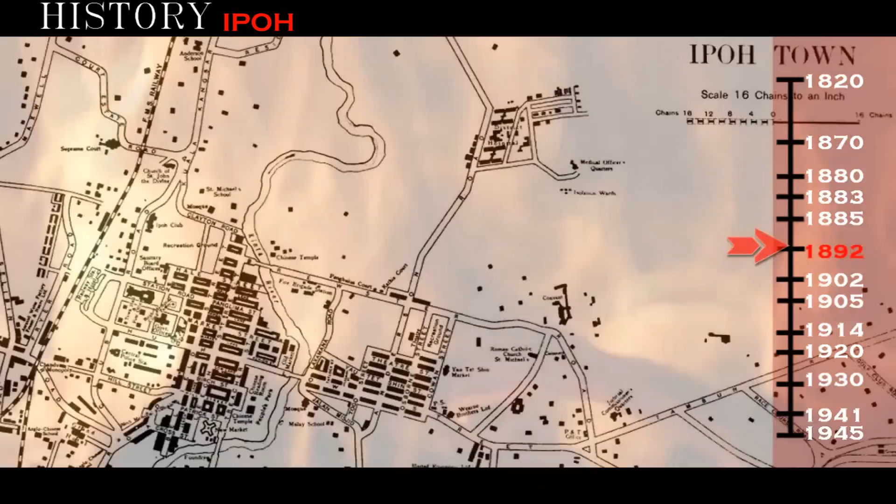However, on June 1, 1892, a fire broke out and destroyed over half the town. The Great Fire of Ipoh gave town planners the opportunity to rearrange the streets in a more orderly grid pattern that remains until today. Overseas chartered banks opened offices, followed by accounting firms, estate agents and brokers.

Vast numbers of people, especially Chinese miners, descended upon Ipoh, transforming it into a business and social center. A local Hakka miner, millionaire Yau Tet Shin, expanded the town across the Kinta River, which became the new town of Ipoh, including a market and a theatre.

The British introduced dredging machines which caused the labour force to decline. Many of them became unemployed and some even changed careers into other industries. As time went by, the Chinese community controlled most of the economy in Ipoh.

The Japanese took over Ipoh on December 28, 1941. They made Ipoh the state capital of Perak. After the British regained control of Ipoh, the city became a center of entertainment and the business community learned to let the good times roll.

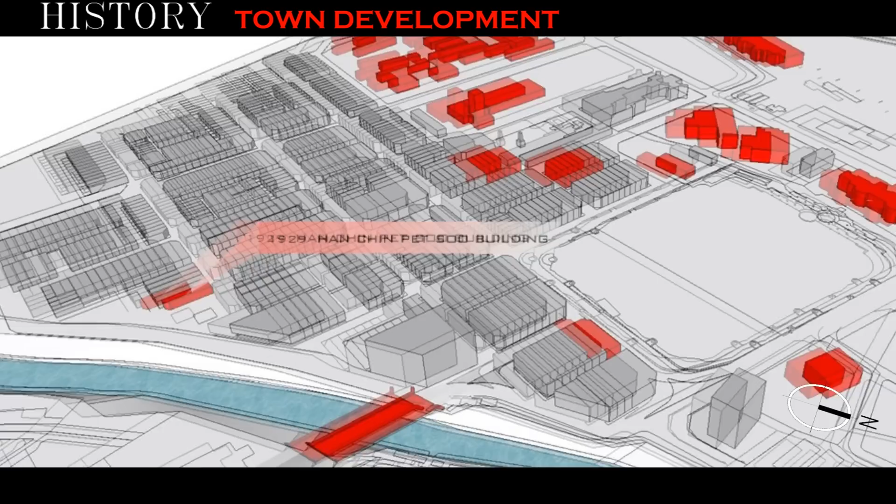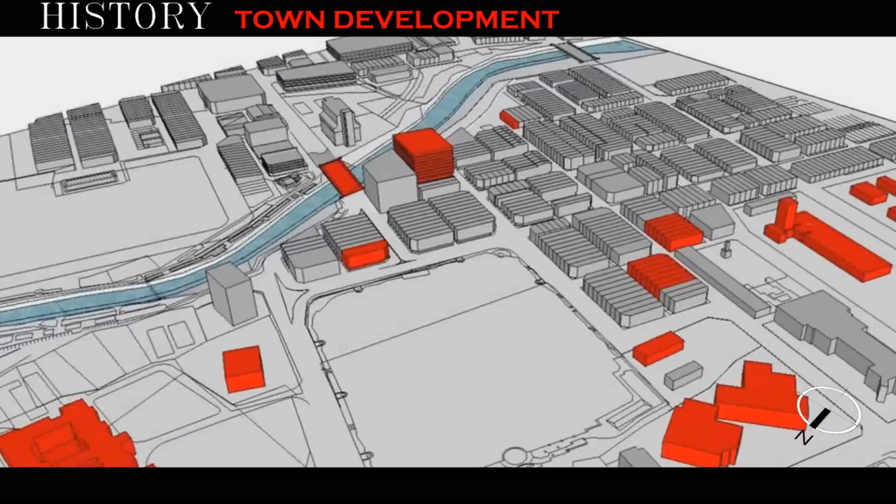The site is enclaved by the corner of Brewster Road and Leach Street, with shop houses in the surrounding area and a good view towards the Kinta River. Our site was previously an Oriental cinema.

Sadly, it was closed down in 1983, only to be replaced by a car park until today. The remaining traces of the cinema wall structure can be seen on the site, illustrating the boundary of the cinema and the size of the back alley during that period.

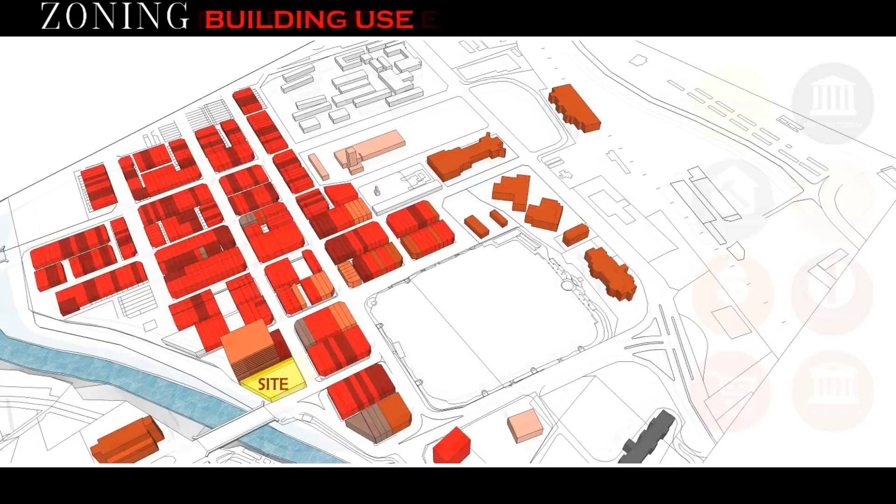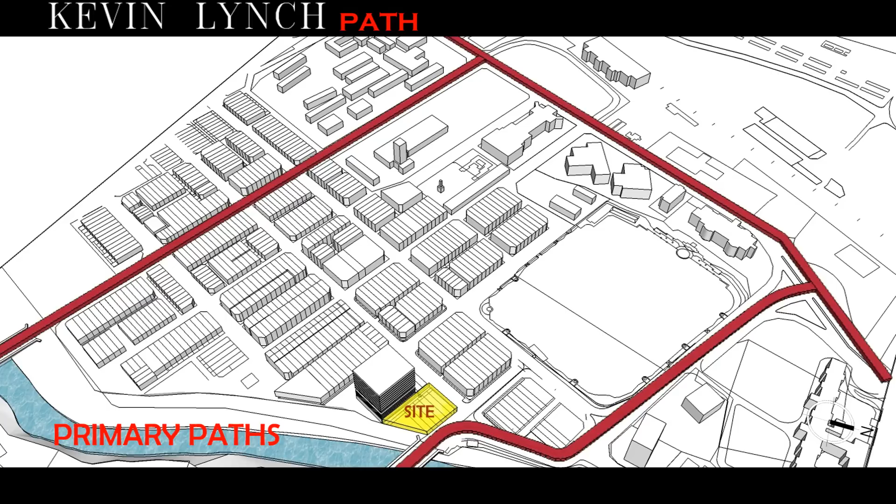The path is categorized according to the traffic density. Primary paths are the main roads that act as an entrance and exit for the city. Secondary paths are mainly one-way roads which branch out from the primary path in the form of a grid pattern, while tertiary paths are small paths like back alley pedestrian paths.

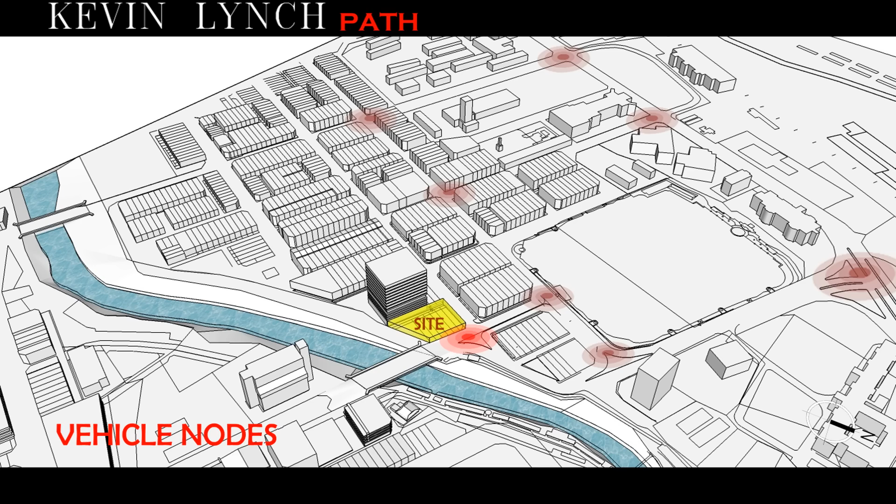The significant vehicle nodes are the intersections of high-density paths where the pace of vehicular traffic will slow down. There is a main traffic light located at this node, which will affect all the other nodes as well as the node in front of our site. Vehicle nodes are important to consider as they create an opportunity for our site to gain attention.

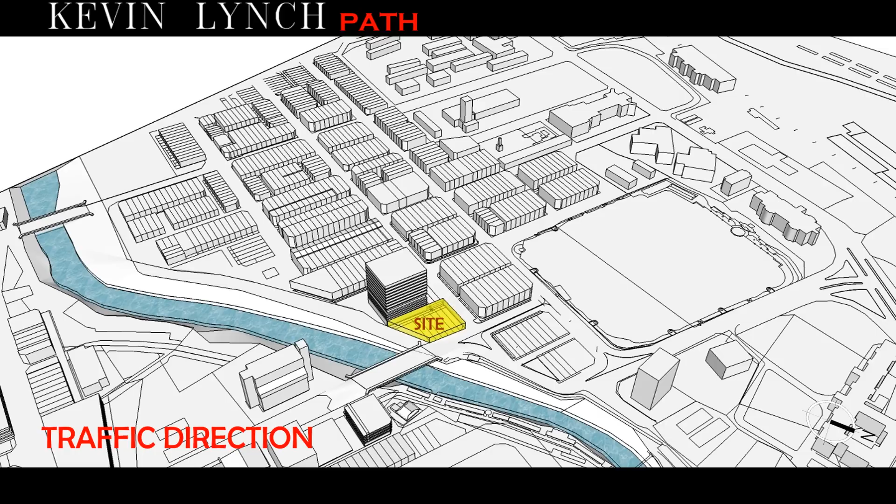The only accessible vehicle path to our site is through Belfield Road to Leech Road, which makes this point the priority vehicle accessibility. These are the activity nodes around our study area.

The trend of the art of Old Town started when Ernest Zacharevic brought in the Ipoh wall art murals. Many art-related activities started to happen around Ipoh Old Town. Connections between the art-related activities show strong bonds that can affect the pattern of town development. The particular site has the potential to be a rejuvenating catalyst to capture the sense of arts in the township.

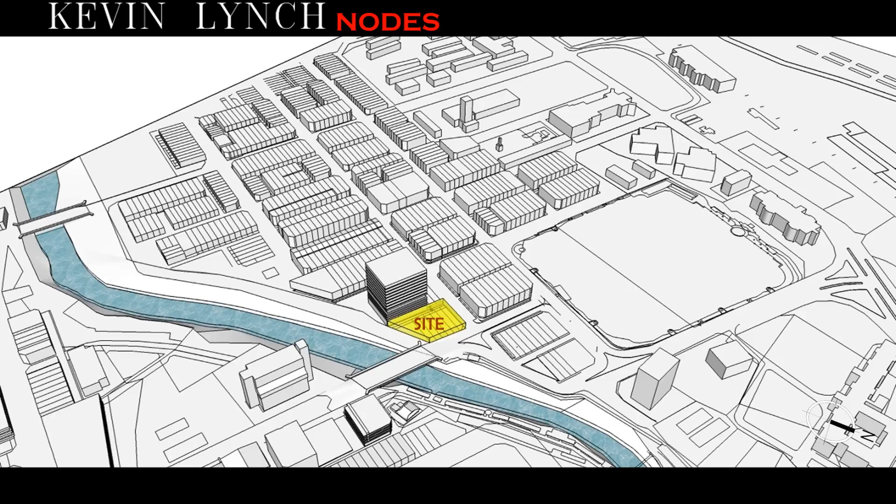This is the legible landform border, Sungai Kinta, that forms the old and new town of Ipoh. A complete township formation should consist of commercial and residential district, administrative district, food and leisure district, as well as artistic zoning for artistic creations and purposes.

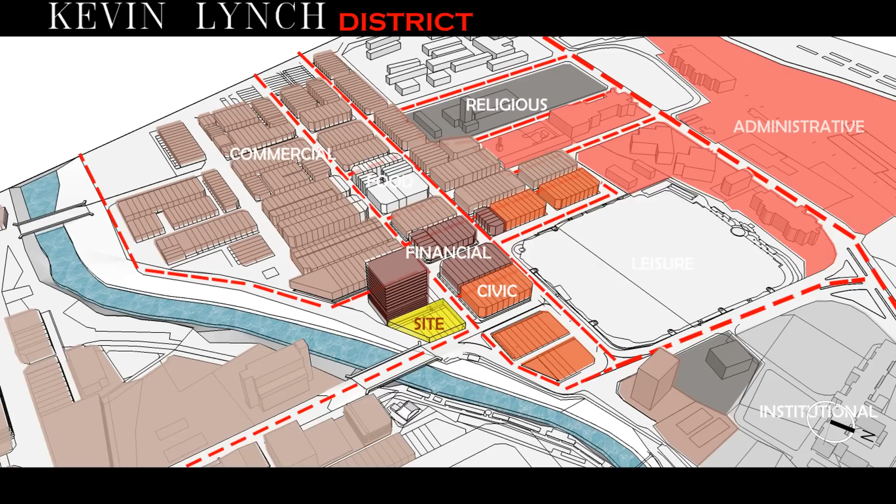Our proposed site gains the opportunity to formulate an artistic area as it is located in a rich contextual location with all the ongoing development of heritage and art-related activities. Furthermore, there is a food and leisure district right beside the proposed site as a supportive element for our proposed program.

Our proposed site also sits between the district for future development plans under the government and the district of Old Town for heritage preserving purposes, giving the opportunity for our site to be the connecting key of these two districts.

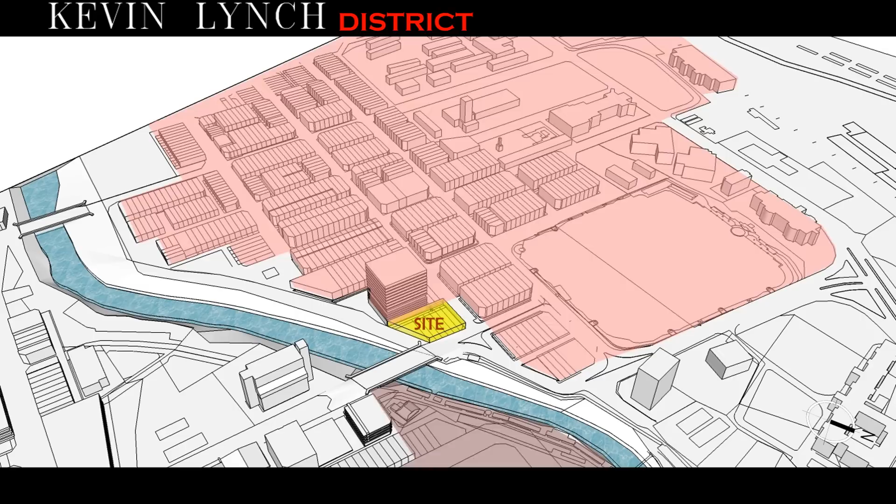The major dominant landmarks around the site are the Padang Ipoh, Majestic in High Court, Dewan Bandaran Ipoh, Birch Tower, State Mosque, Complex Yik Foong, and Pusat UTC in the new town.

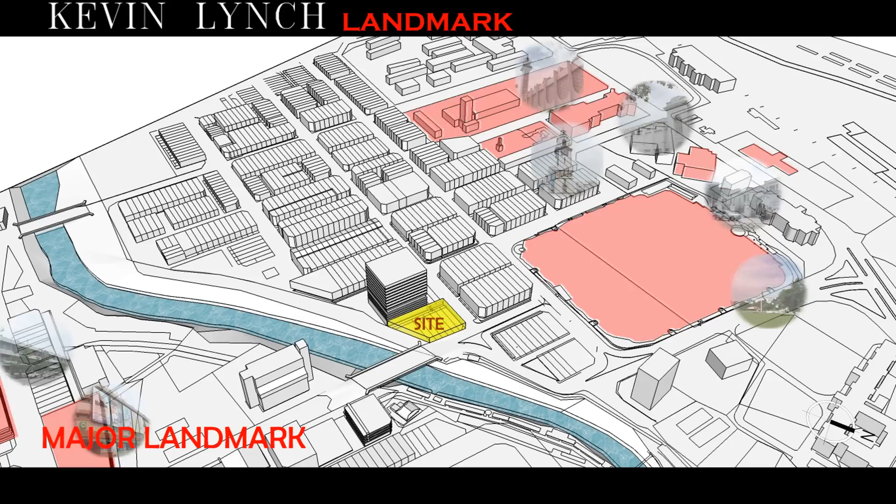These are the landmarks which are visible from every angle and able to lead urban viewers to the proposed site. There are also local landmarks that develop and persist the artistic and traditional value to prevent the loss of Ipoh tradition, for instance the Happy 8 Retreat, Missing Marble Cafe, Restaurant Kong Heng, Tianjin, and more. All these features provide supportive elements to our colony's artistic programs.

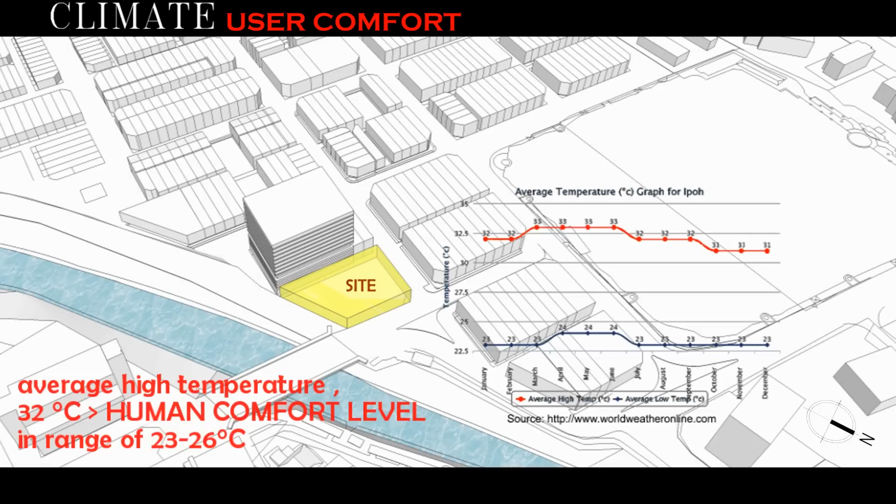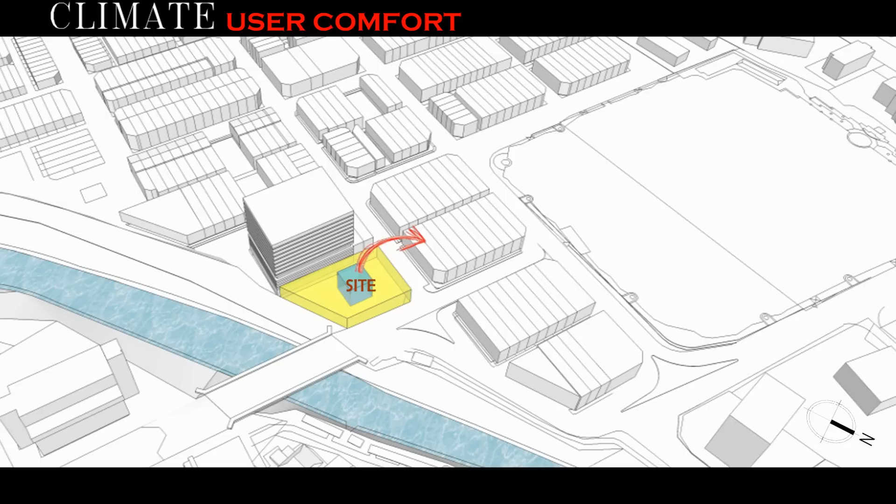Over the course of a year, the temperature of Ipoh typically varies from 22 to 33 degrees Celsius, whereas the relative humidity typically ranges from 56% to 100%. Therefore, it is important to design buildings with consideration of ventilation, such as designing a central atrium for natural ventilation, or implementing appropriate materials for the building shell to improve user comfort level.

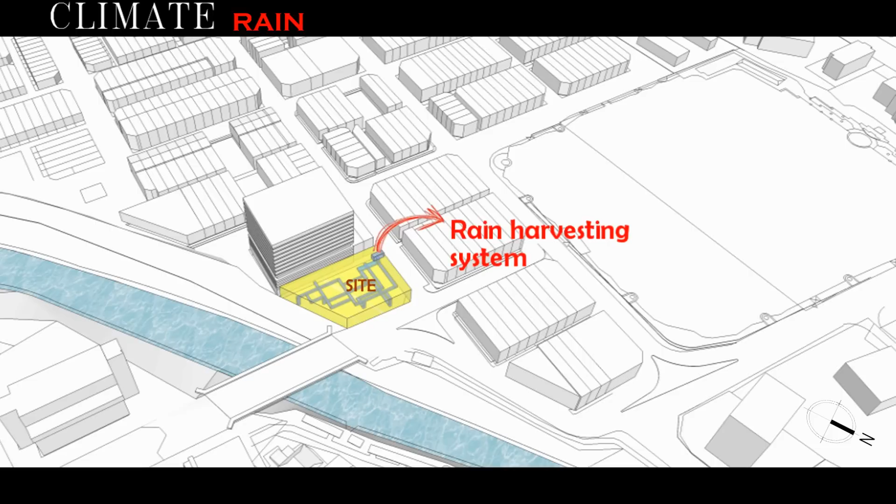The multiple high-density rainstorms provide suitable conditions for applying rainwater harvesting systems to the building.

Wind speeds in Ipoh vary from 0 to 4 meters per second, providing a gentle breeze to the area. The prevailing winds are from the northeast and southwest. The huge road beside the site draws wind towards the area without any obstruction. Therefore, it is wise to bring in cool breeze with strategically designed openings.

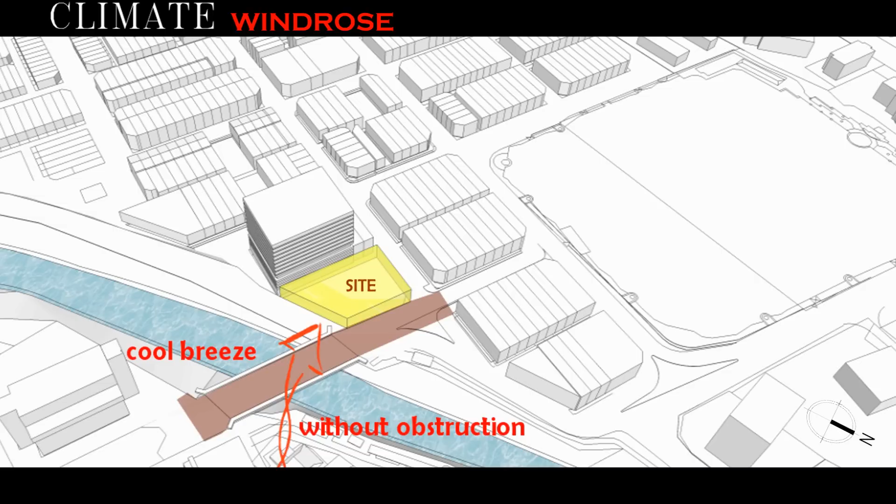The length of the day does not vary substantially over the year, staying within 12 hours throughout. However, the adjacent Maybank building helps provide shading to the site.

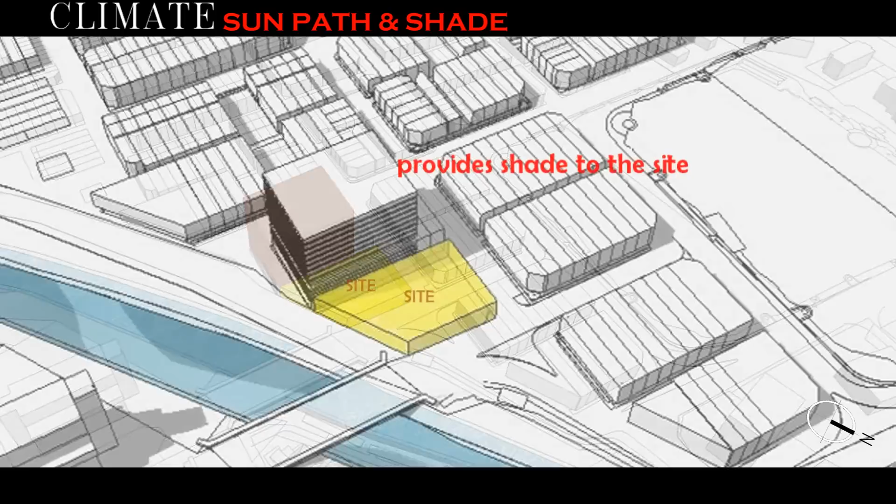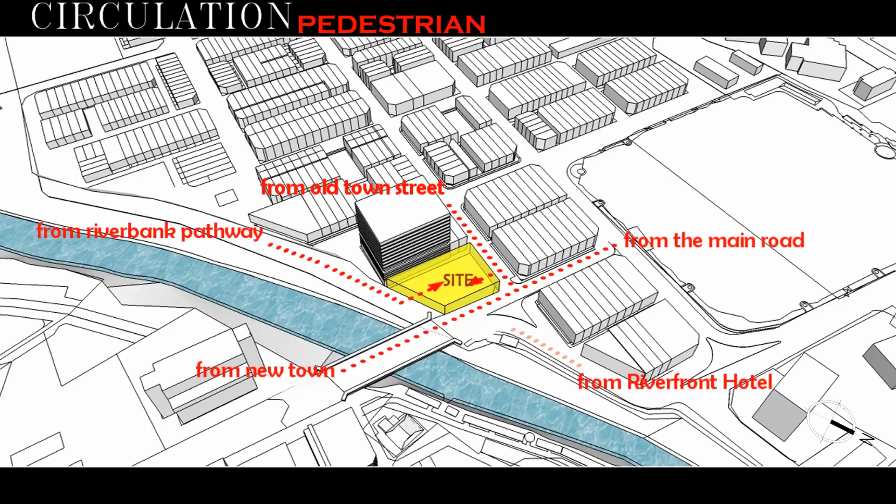The pedestrian circulation shows the possible entrance approaches to the proposed site. Pedestrians from the Riverfront Hotel will not be able to reach our site, as there is no zebra crossing on the main road.

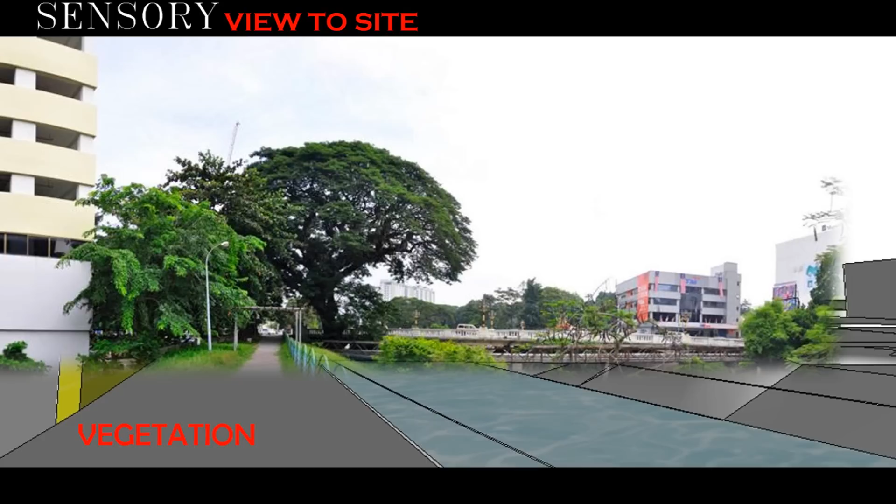The gigantic mature tree, approximately 24 meters tall with a crown spread of 18 meters in diameter, is significant to the site. As the site is located beside the main road, the mature tree helps filter the air by absorbing tons of carbon dioxide.

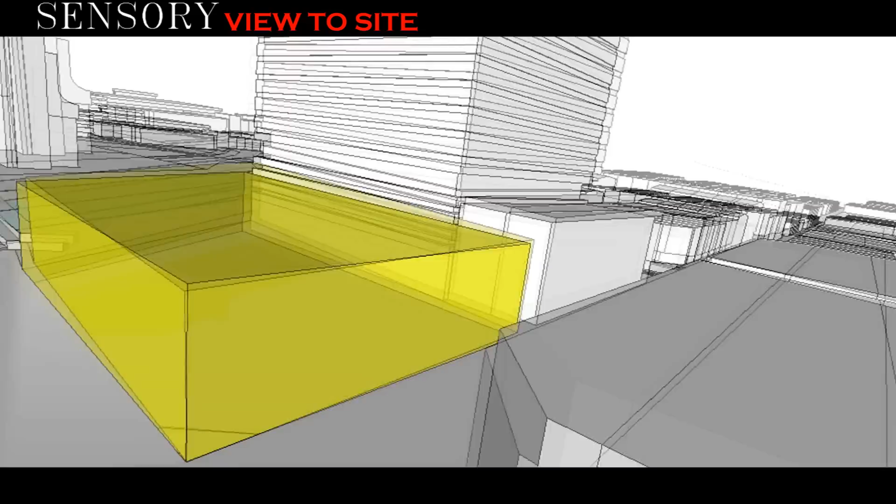The trees soften the edges between solid buildings, providing a more pleasant sensation to pedestrians. The trees near the site entrance average 12 to 18 meters tall, with a crown spread of approximately 8 meters in diameter.

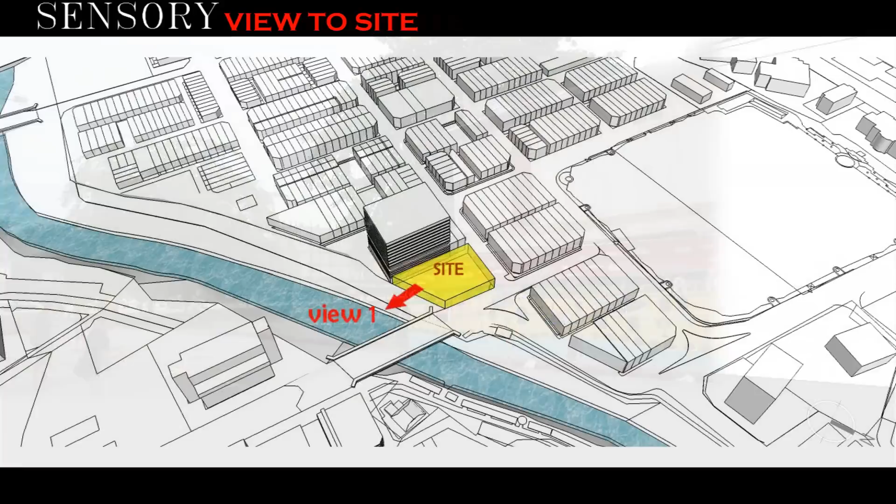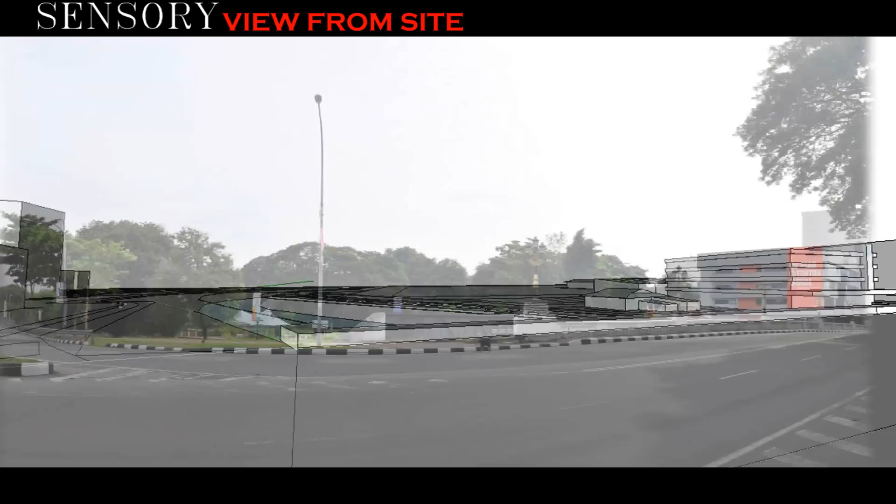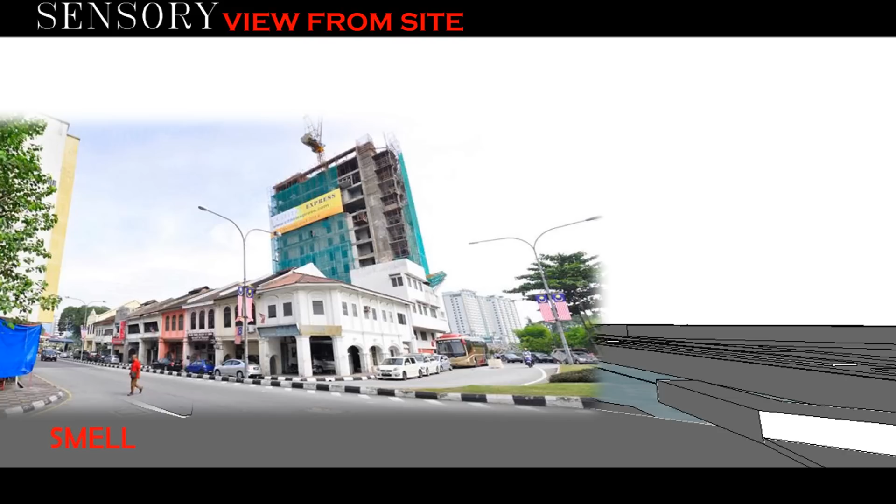With a soft sound of flowing river, the hustle of the main road traffic is the major cause of the high noise level. The high density of vehicles crossing the bridge releases smog and causes pollution. As a point beside the traffic node, the sound sources are mainly from vehicles, along with some temporary construction and celebration noise. The major contributors to bad smell are vehicles passing through the main road towards the new town.

Less circulation of vehicles reduces the noise of the traffic. However, due to the preservation works nearby, temporary construction noise affects the serenity of the site. By having one-way traffic, the emission of smog and pollution by vehicles is lesser than on the main road.

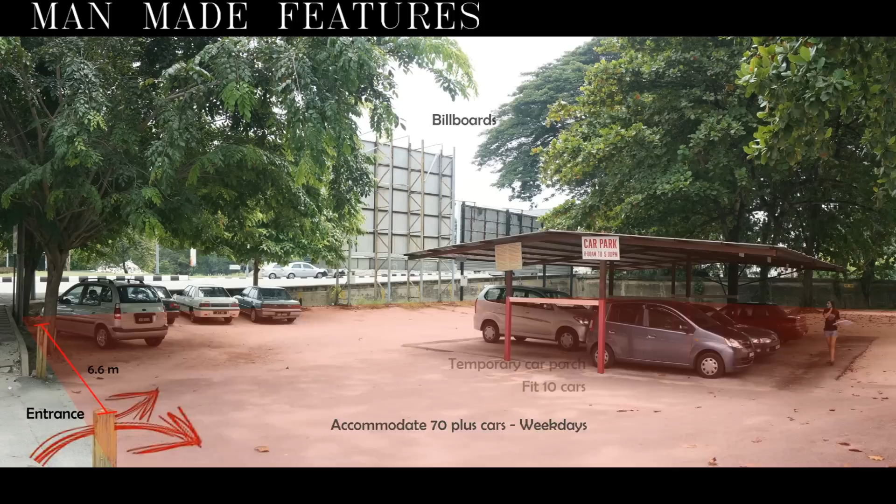Currently, the site is a public car park able to accommodate 70 plus cars on weekdays, as the parking space is quite limited. A car park for our Artist Colony project is crucial in our design.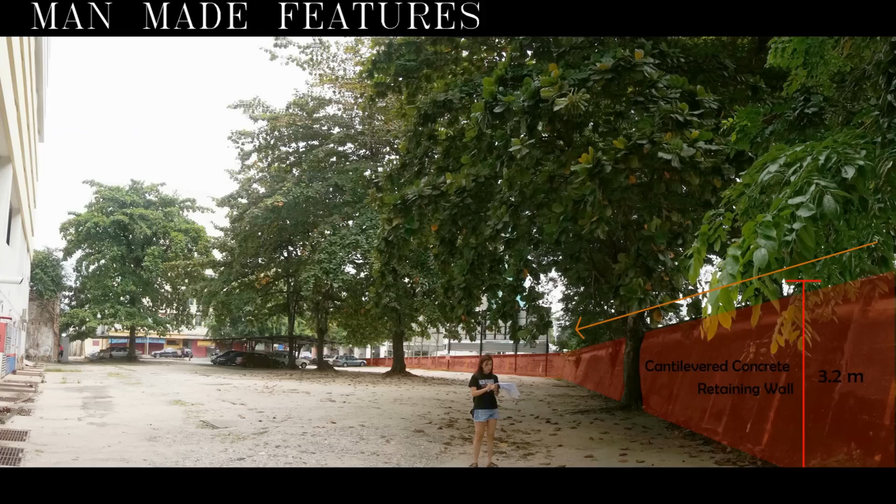The retaining wall is necessary to prevent soil erosion, as Kinta River is near our site, especially during the monsoon season. The existing retaining wall causes our site to have two different adjacent ground levels. The reserved landscape is 3.2 meters higher than our selected site, which increases the design quality of accessibility between our building and the riverside activities.

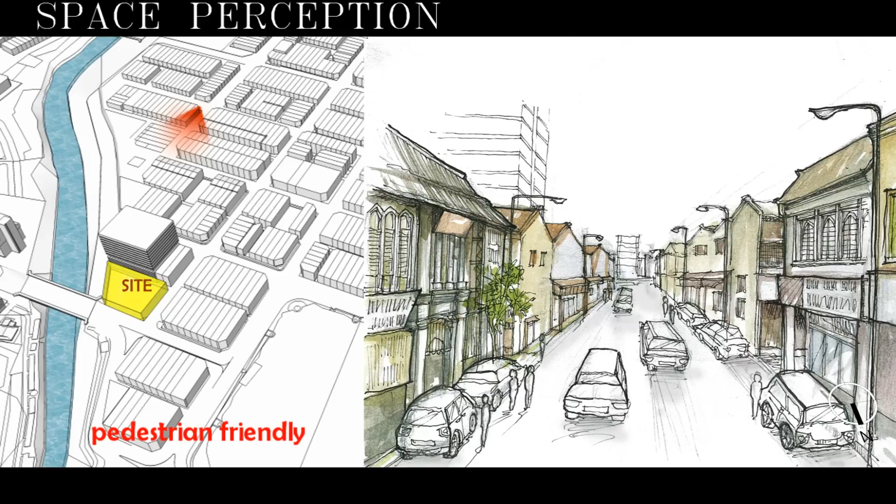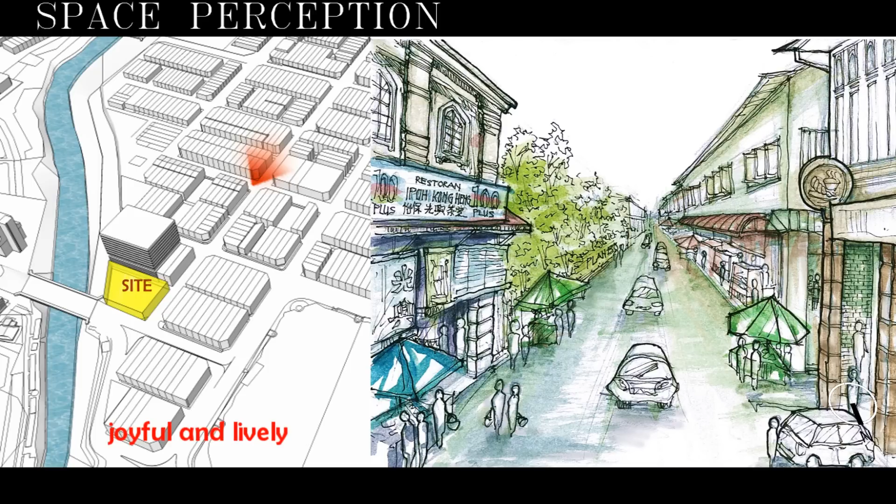The shop houses along both sides of the street create a comfortable feeling for pedestrians, with an unobstructed view. As the site is located at Ipoh Old Town, with a variety of food restaurants and cafes, the street brings joy and liveliness by drawing crowds.

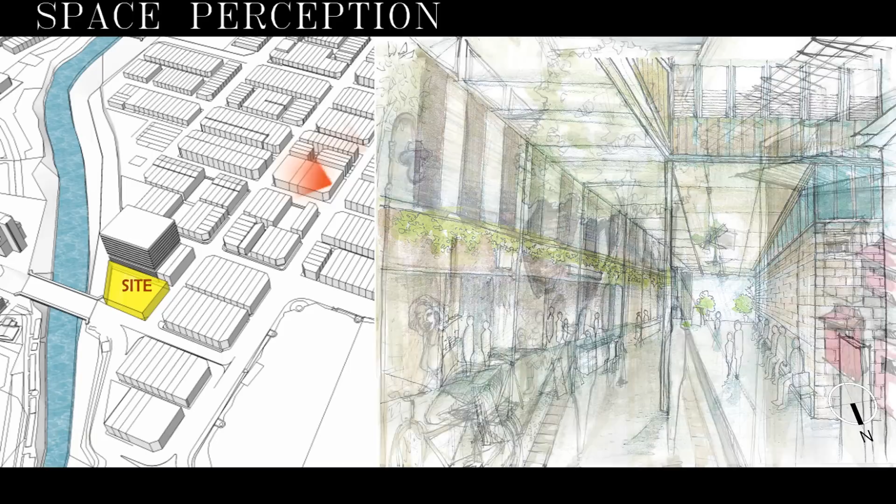The edge of the shop houses at the sides of the abandoned space acts as an outline that frames and emphasizes the views. The communal space in Plan B restaurant gives a sense of permeability with visual connection to the street. A sense of appreciation for the beauty of art is brought by the mural paintings alongside the peaceful alley.

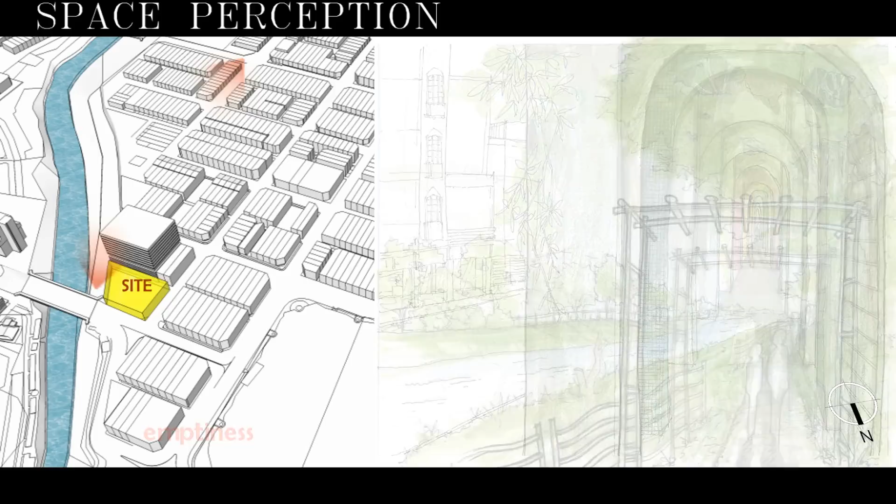A feeling of emptiness and tranquility is perceived along the 5-foot walkway of the shop houses. A relaxed and comfortable feeling with pleasant views when walking along the riverbank. With the help of vegetation on site, the site provides a shaded and well-ventilated space for users and pedestrians.

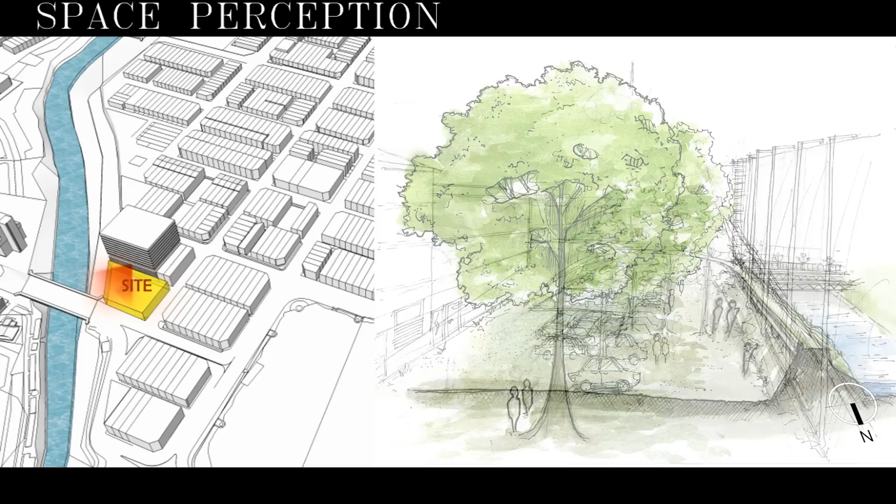The retaining wall obstructs the view across the river from the site, creating a feeling of restriction due to the difference in ground level. There is an overwhelming sense surrounded by tall buildings that does not preserve the pedestrian scale of the street.

The site acts as a gateway that connects between the old and new town through the bridge. The river located beside the site acts as a catalyst.

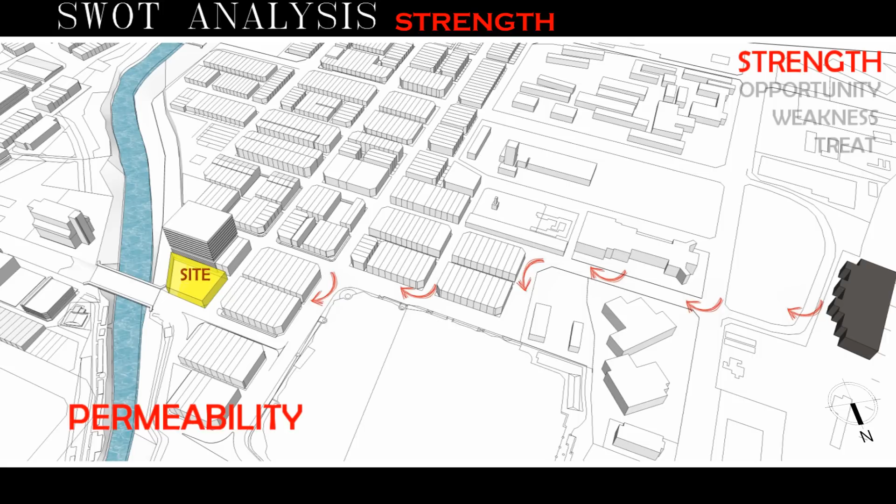It possesses strong visibility from different points around the site. It is easy to access our site from KTM, commercial area, the path along the river, and the new town.

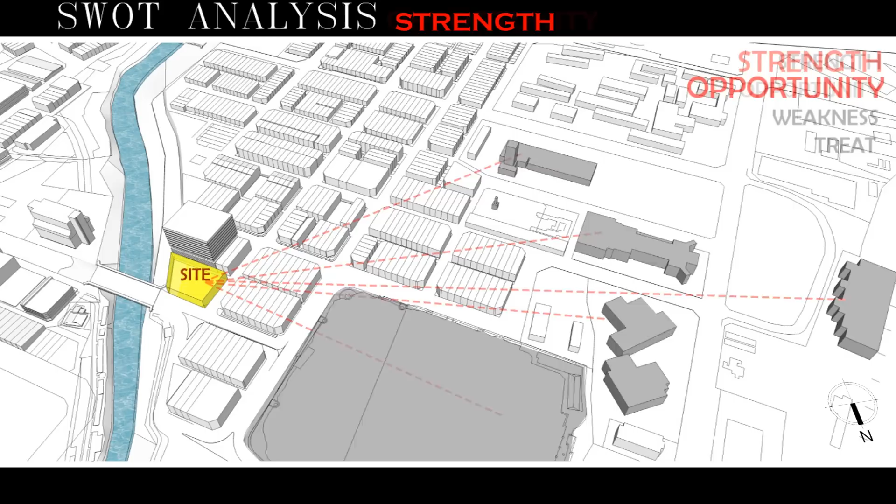There are a few heritage nodes at the site that help attract tourists. Art surrounding the site, such as mural paintings, art and culture textiles, and handicraft could be brought into the site.

Integrating with the river, the proposal of design may provide activities connecting the river with the site, bringing in open public space and streetscape from the surrounding area into the design, with opportunities to interact with different artists around the world.

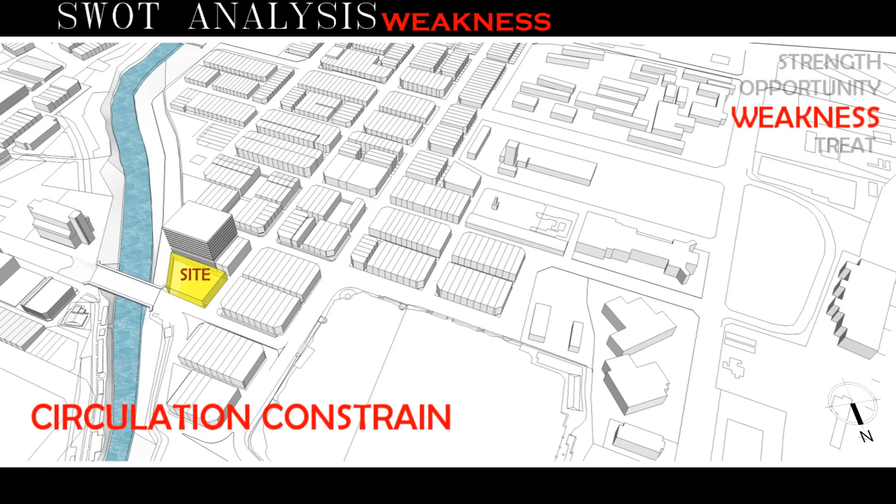Most of the roads and streets are one-way paths. People cross the road recklessly due to the lack of pedestrian zebra crossing lanes. Flood might happen during heavy rain caused by river overflow and drainage problems.

Located in between the bastions called Rivotte and Bregille in Besançon, the site reflects the historical richness of the city. Remarkable vestige of a prestigious history, the existing building in bricks attests to the industrial river traffic and activity of the region. The site is inscribed in a generous natural environment between the Besançon hillside and close to the riverside of the Doubs.

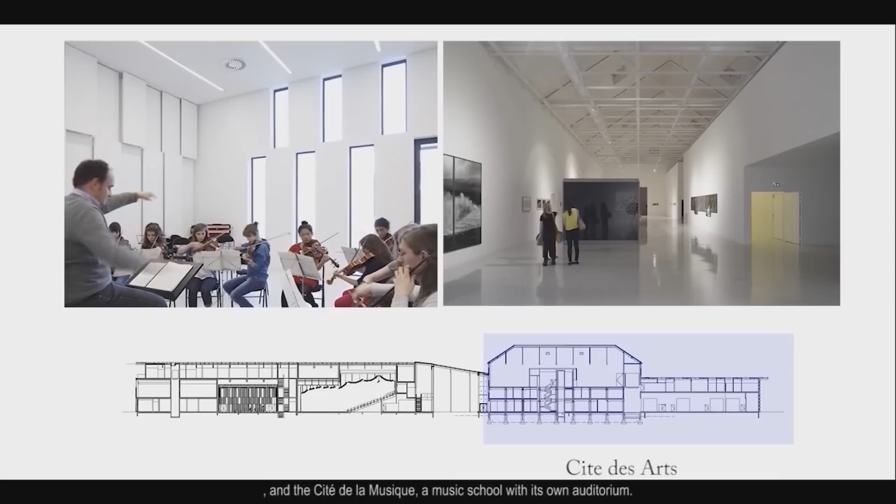Entitled Cité des Arts, this culture center comprises the Besançon Art Center and the Cité de la Musique, a music school with its own auditorium. This project is the result of the union between history and architecture, water and light, city and nature.

The site brings with itself both its own history and the history of the city. The project's longitudinal geometry follows the orientation given by the Vauban warehouse, where all storage of wood is kept and participates in the richness of the building.

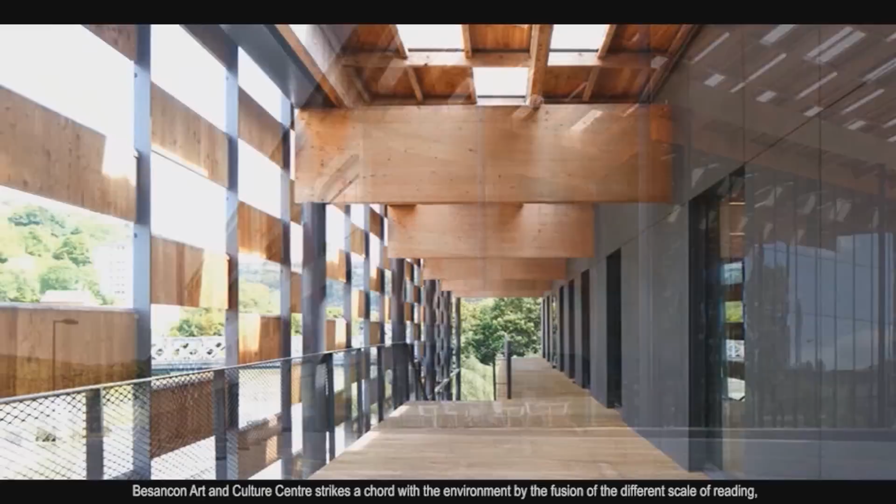Besançon Art and Culture Center strikes a chord with the environment by the fusion of different scales of reading, from the details to the entire project, by blurring the limits between interior and exterior, creating a building able to enter into resonance with its environment, the hills, the river, and the city of Besançon.

The roof creates the link between the building and its environment and makes the project blatant. Semi-transparent, the roof symbolizes the fusion between built and non-built, and acts as camouflage when viewed from the citadel, a local castle on Besançon Hill.

It is an invitation to the citizens to gather below its protections. It symbolizes the encounter between the city and the nature, the citizen and the riverbank, the public and the culture.

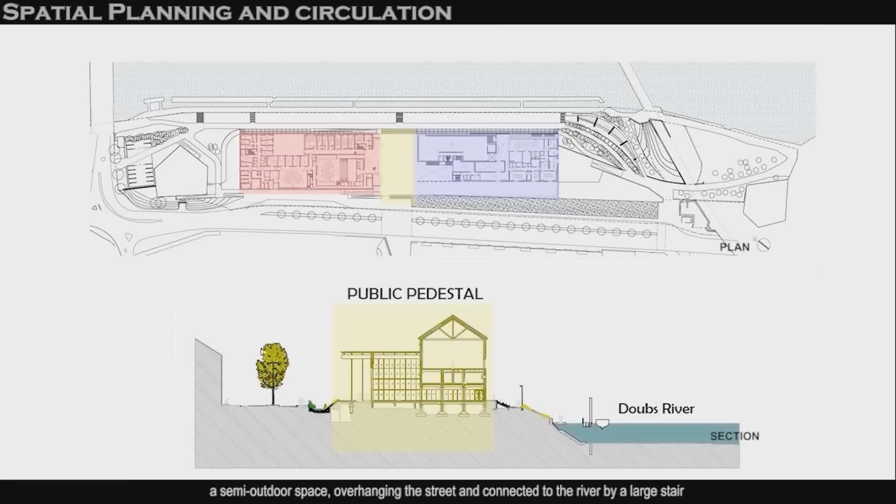The overall ground plan shows the music school and art center separated by an art passage pedestal, a semi-outdoor space overhanging the street and connected to the river by a large staircase. It creates a pathway for the public from the street to the riverside, appreciating the view along the river.

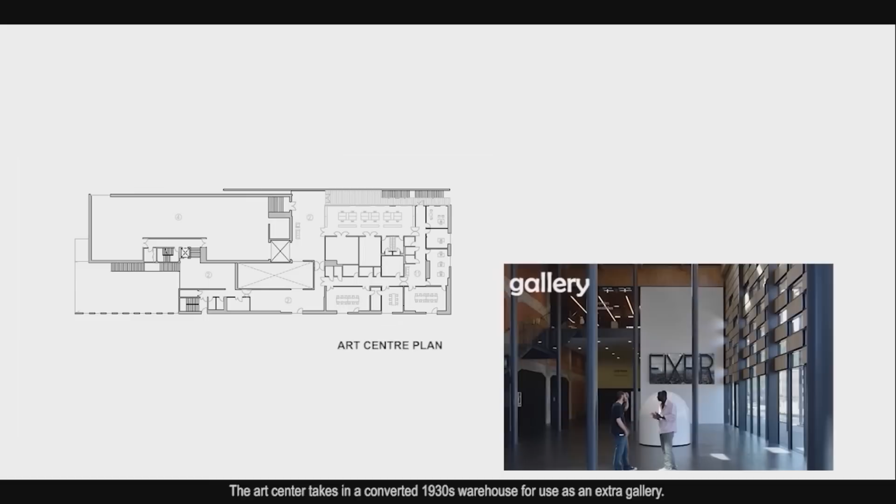The art center takes in a converted 1930s warehouse for use as an extra gallery. It is partially connected to the pedestal and creates a continuous art passage from outdoor to indoor. Workshops, studios, classrooms, and other private spaces are located on the second and third floors.

Unified below the large roof, this transparency of facade is partially defined by the necessity of the program. The large lobby is exposed as much as possible transparently, open to both the art passage and the city side.

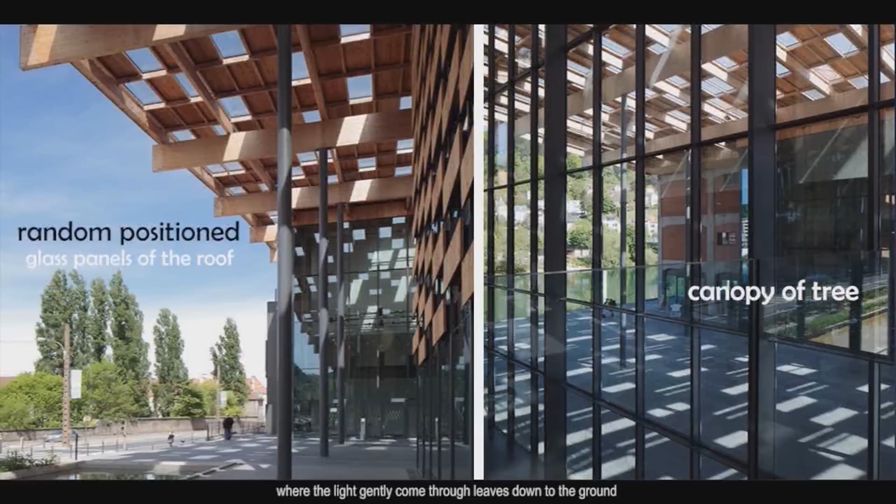The natural light is diffused through the randomly positioned glass panels of the roof in order to achieve the feeling of being below canopies of trees, where the light gently diffuses through leaves down to the ground.

Suspended by a timber framework, the facade, made of a variation of transparency and opacity, represents a unique and innovative design. The thin, pixelized layer floats on top of the Doubs River; the shadow and light variations interweave with the reflections of the reflection pond, becoming at night a landmark reinforcing the entrance of the city.

In conclusion, Cité des Arts et de la Culture perpetuates the notion of protection, but can be read as a monumental gate between the city and the river.

The design reinforces the genius loci of the site through a strong and clearly identifiable building, while still respecting the relationship between the existing bastion, the river, and the city.

Similar to our site, which is located beside the Sungai Kinta, it has the strength to become a new landmark and a gateway between the old town and the new town of Ipoh.

The Nida Art Colony is located in Nida, Lithuania, in the northern part of Europe, on the Curonian Spit, a peninsula dividing the Curonian Lagoon and the Baltic Sea. Nida is a very small resort town of only 1,650 residents, and the majority of the land is still undeveloped. Due to this, Nida remained an unspoiled and clean territory, becoming a meeting place for artists and others seeking the experience of untouched nature. Nida became famous as a colony for artists, named the Paradise of Painters, because they found the Curonian Spit an oasis of peace and a source of creative inspiration for their artwork.

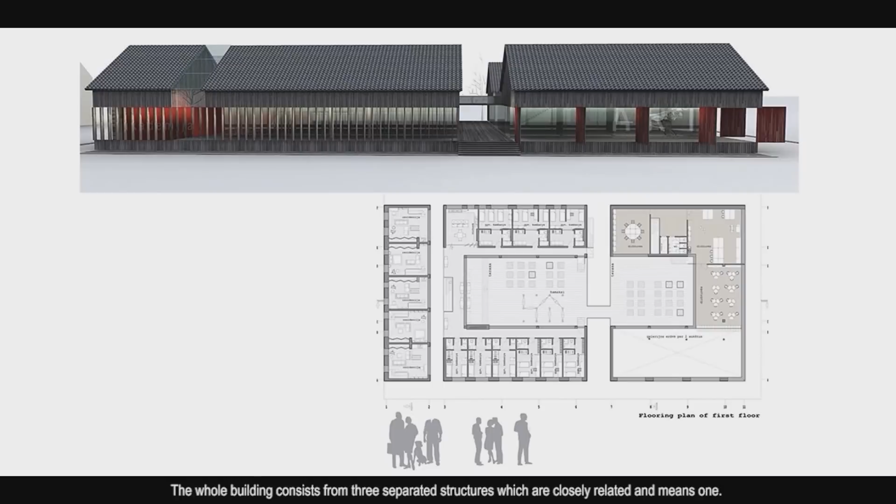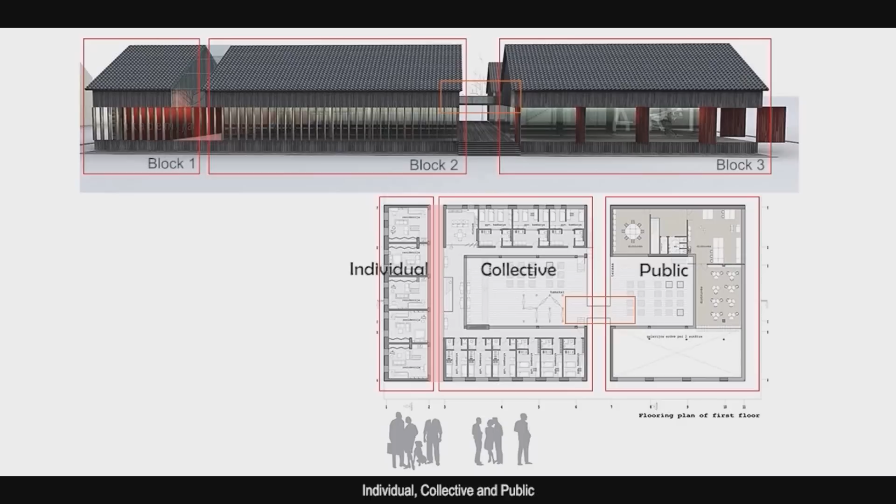The building consists of 3 separate structures which are closely related and mean one. The 3 parts are connected using corridors and represent 3 lines: individual, collective, and public. Each building is divided by the corridor in between to differentiate the public and private spaces.

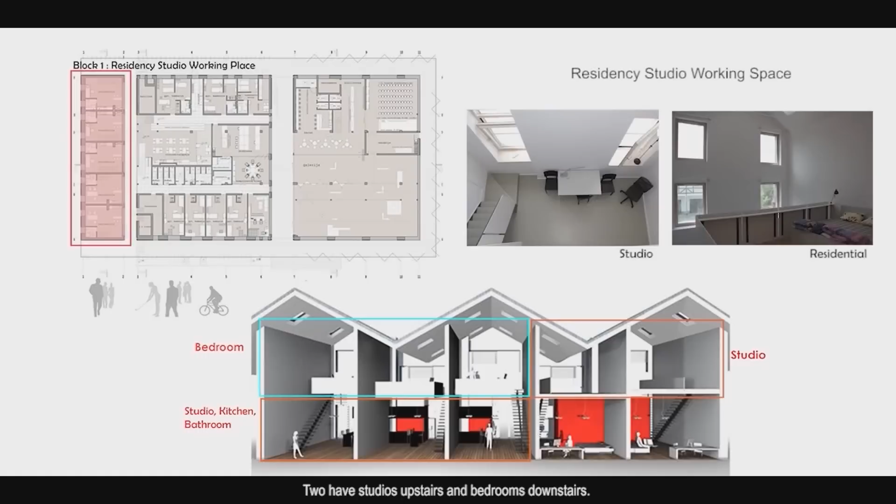The first block is a residency studio working place for artists, lecturers, and guests. There are 5 two-story fully equipped residences for artists. 3 of the residences have studios, bathrooms, and kitchenettes on the ground floor, with bedrooms on the first floor. 2 have studios upstairs and bedrooms downstairs. The studios and bedrooms vary slightly in size, but average at 30 square meters each. This residency functions as a space where guest artists can have their private discussions and working space.

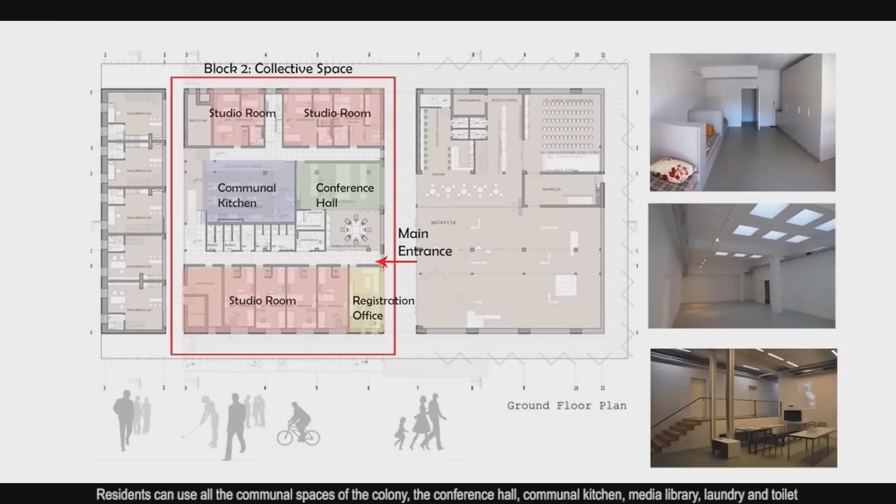The second block is a collective space, the main block of the art colony, mainly for students. Residents can use all the communal space of the colony: the conference hall, communal kitchen, media library, laundry, and toilet. On the first floor, there are more studio rooms and an open roof terrace provided for students as communal space. The third block is a public gallery space.

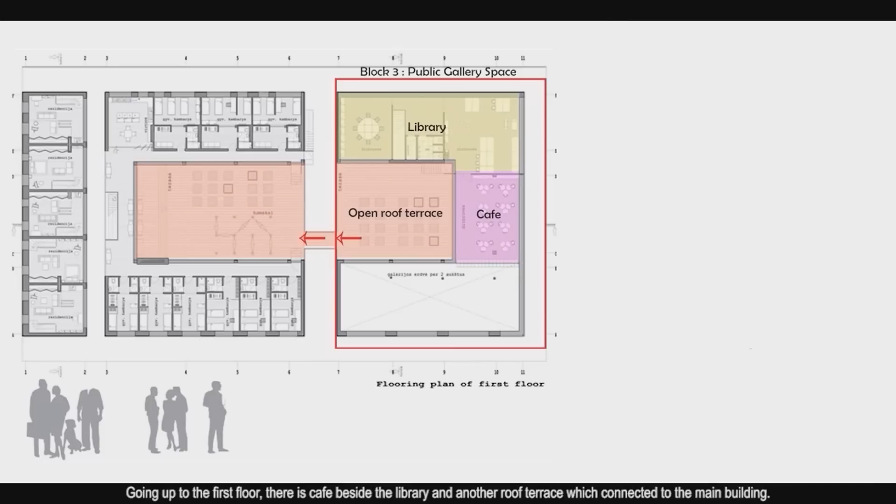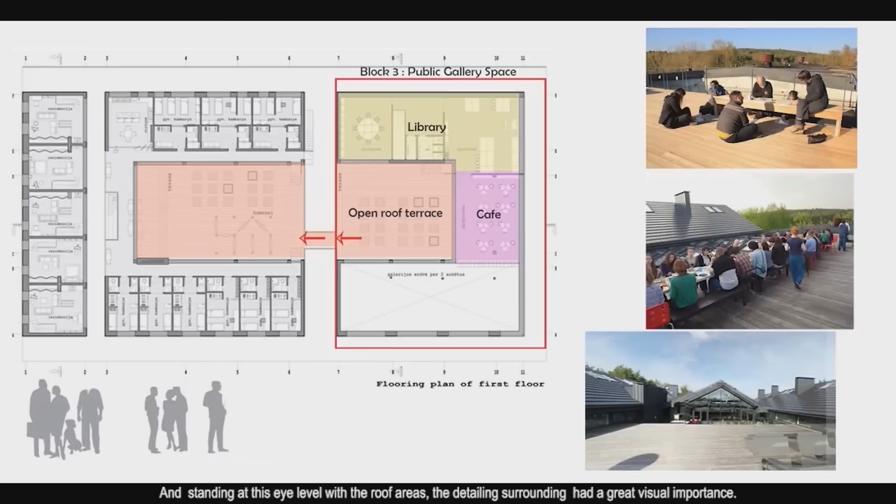It consists of a double volume gallery, 2 levels of library with a digital image room, a workshop with an exhibition space, storage, and toilet. Going up to the first floor, there is a cafe beside the library and another roof terrace which connects to the main building. This central open-air terrace acts as the node in the colony where all the residents gather. Standing at eye level with the roof areas, the surrounding detailing has great visual importance.

In conclusion, the overall objective of the NIDA Art Colony is to improve the quality of art and design education by promoting international cooperation. Hence, the NIDA Artist in Residence program gives a very good example for our Artist Colony project, offering an opportunity to unite local and international artists in Ipoh and provoke our local art education.

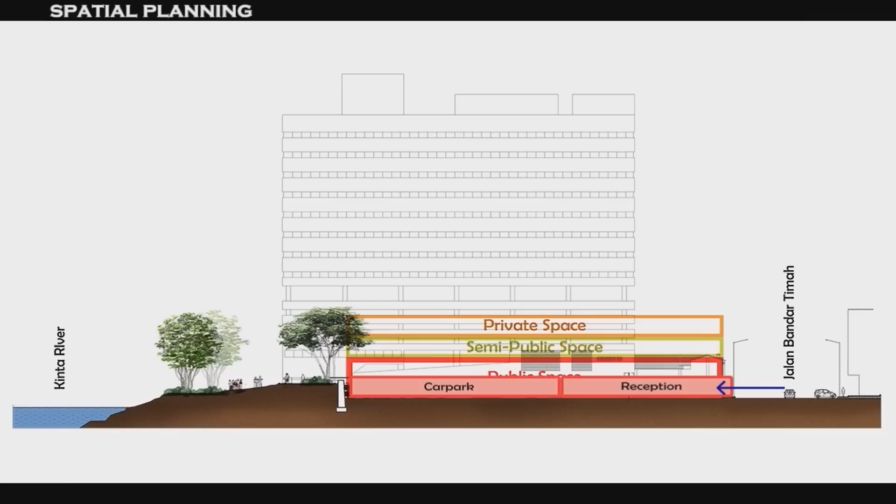The strategy of the spatial arrangement is essentially planned according to private and public space. With a car park, the public ground floor encompasses the reception, which acts as a welcoming space to lead the user to the upper floors of the building. The cafe is located beside the riverbank promenade to have visual engagement with its context.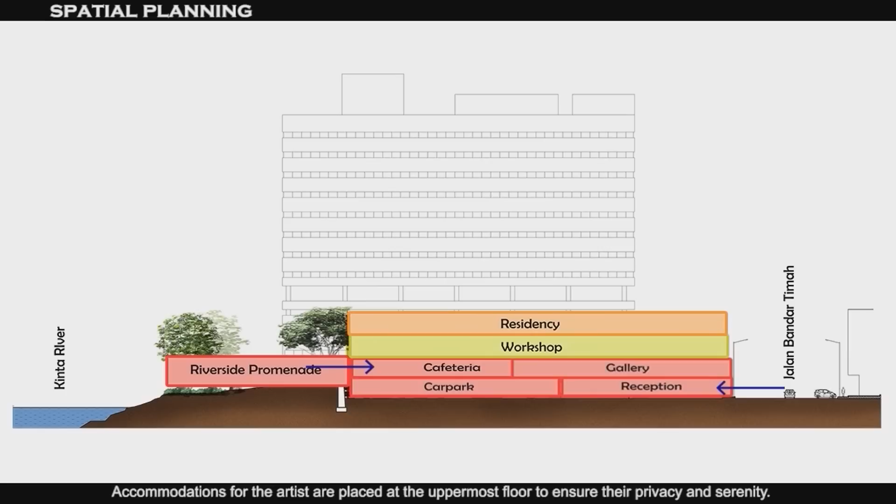Artists' works showcased in the gallery are visible from the exterior, as the building sits right in front of the road. The workshop is a transition space between the public space and the artist's residency, fostering greater interactions between the artists. Accommodations for the artists are placed at the uppermost floor to ensure privacy and serenity.

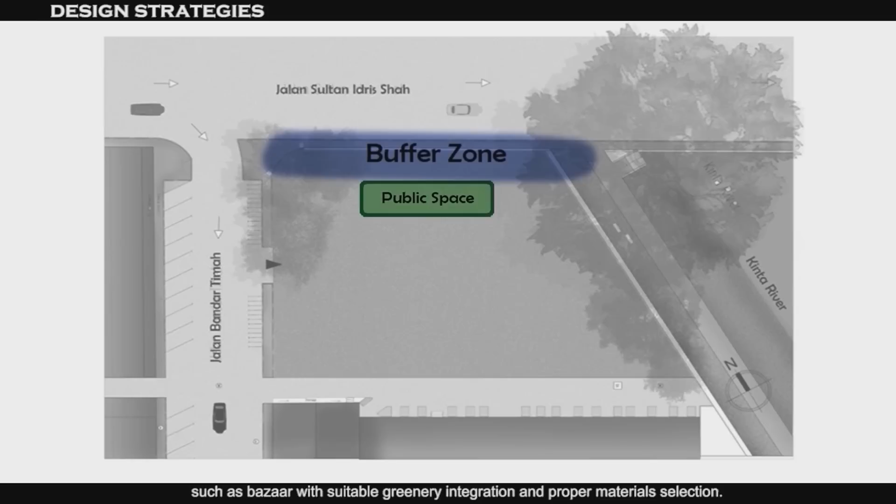Due to the high decibel level of vehicle noise, the building frontage should act as a buffer zone to lower the sound level. For example, an open public space that allows a higher standard noise level can be located at this area, such as a bazaar, with suitable greenery integration and proper material selection.

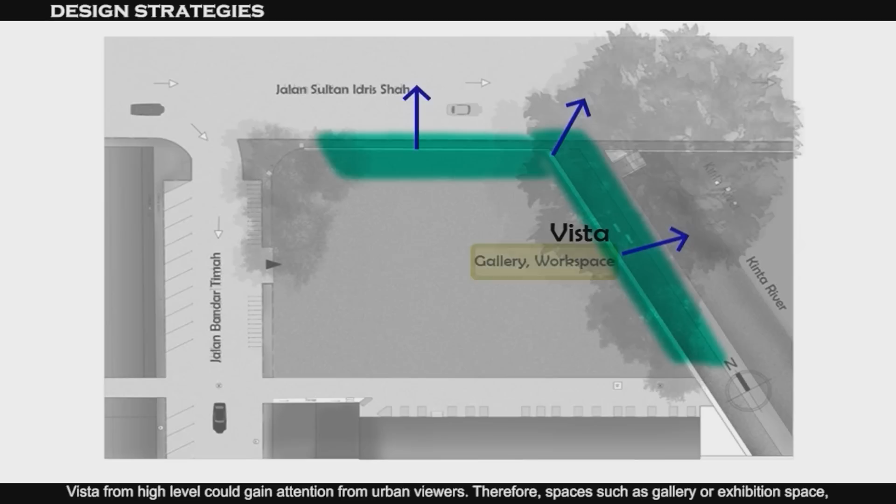A cafeteria could be located next to the riverside to interact with either the vista or the activities, revitalizing the dull side of the river. Vista from a high level could gain attention from urban viewers. Therefore, spaces such as galleries, exhibition space, or workspaces are suitable to be located in this area.